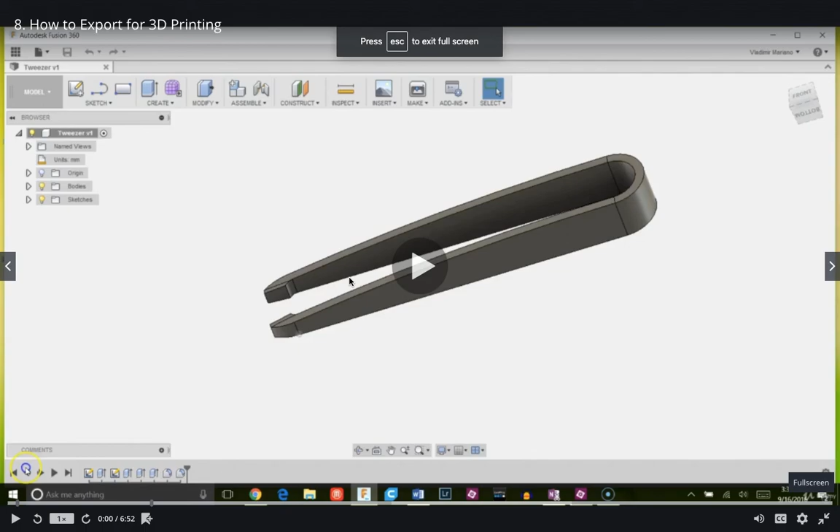Now that we've finished making our first 3D printable design, let's look at how we would send this to the 3D printer. With Fusion 360, this is very simple. Long gone are the days where you have to install a separate plugin to export this as an STL and then open up your printing utility to bring it in.

All you have to do is look at this icon where it says 3D print, or make. Click on it and you get this 3D print dialog box. The first thing it's going to do is have us make a selection. So what is it we want to print? I can just go ahead and choose my model.

As far as refinement, I tend to leave mine at medium and it does fine. Make sure under your output that Send to 3D Print Utility is selected. Here's the beautiful part: if you have any of these 3D printing software installed, it will actually go ahead and list them right out of the dialog box here.

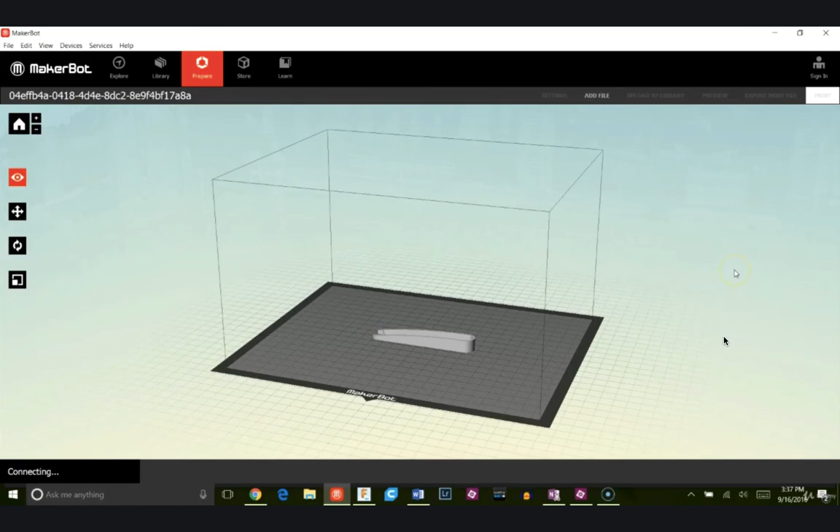So I can go ahead and, let's say I want to send it to my MakerBot. I'm just going to click OK, and it basically takes care of the rest. It'll open up MakerBot and actually place my model right on the build plate.

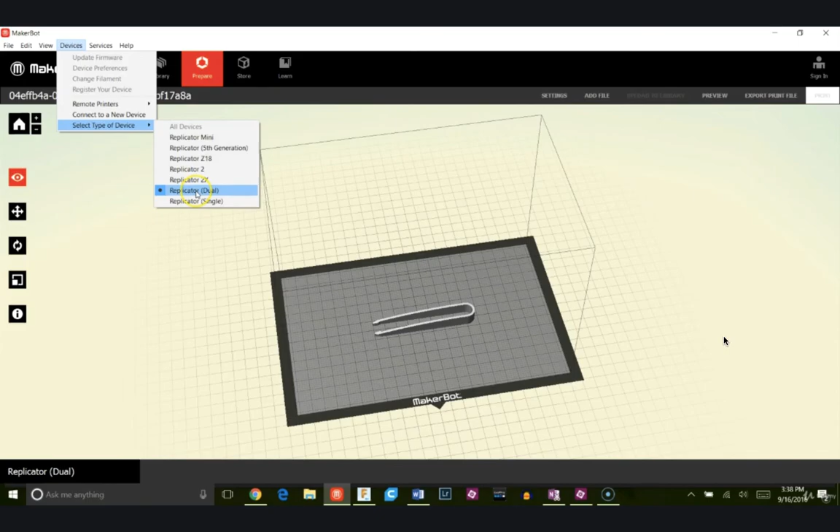Now let's walk through how I'd approach this as I'm printing. You may have experience with this software or you may not, but basically the first thing I would do is choose my device. I'm going to go to device, select type of device. I have a few printers, but let's say I want to send it to Replicator 2. I'll make sure that's the one selected.

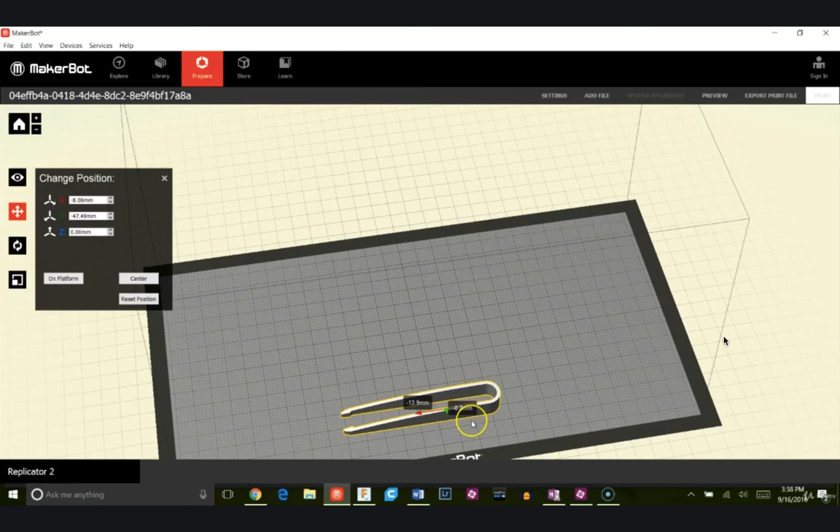Next I can position this simply by using these manipulators on the left side. If I want to place this more to the front, I can do that, or move it to the sides. Every 3D printing utility will have these sort of options to allow you to position and rotate your objects. In this case, it positioned it perfectly - that's exactly how I want to print it.

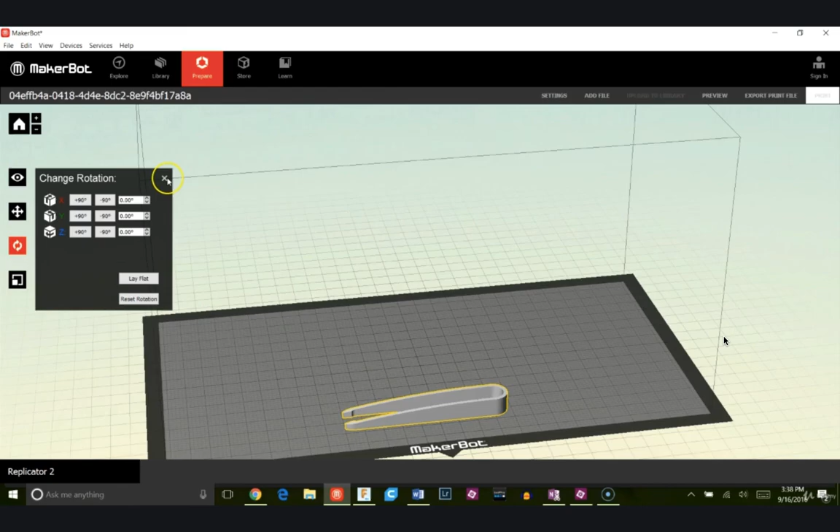But let's say, for example, that it was positioned like this. Well, you obviously are not going to print it in that orientation, so you would want to go ahead and position it the way that it's actually going to be able to print correctly. So you can play around with those. What I like to do, especially with the MakerBot software, is go to Edit and choose Auto Layout All, and that will end up usually doing a good job selecting the best orientation to 3D print the specific item.

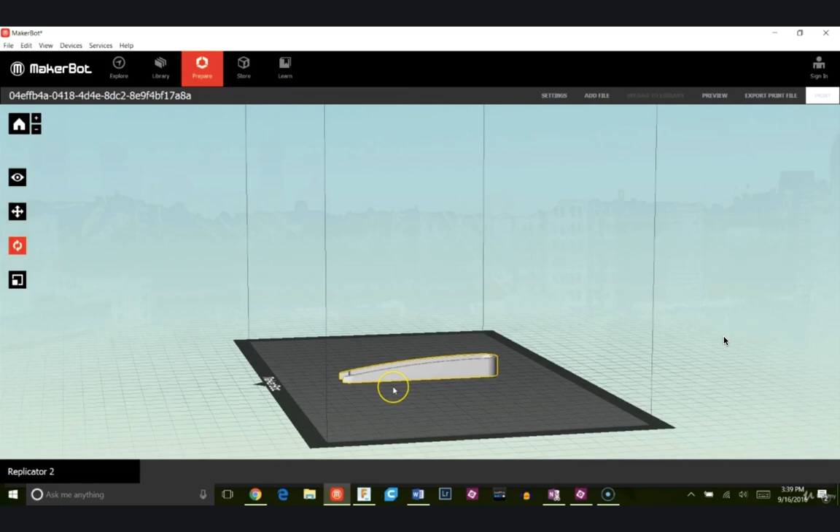Just remember how a 3D printer works - it relies on the bottom layers to support the top, when we're talking about this type of technology, fused filament fabrication. So just make sure it's positioned in a way that it's going to be able to print.

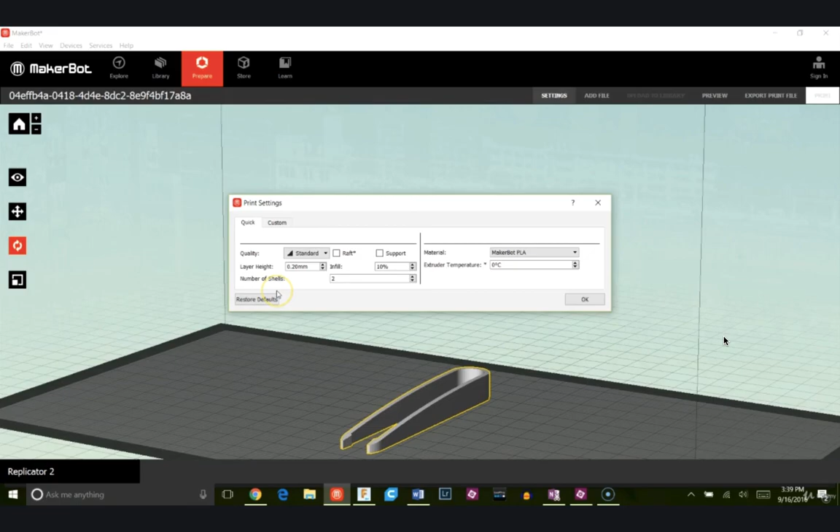Next, I'll briefly talk about my settings. I usually stick with 0.2 millimeters. You can go down to 0.1, or maybe 0.25 or 0.3. I usually try to print without a raft, with infill. I'm usually about 20%, and in this case I'm using PLA, and my extruder temperature with MakerBot I usually do 230.

Sometimes it's just a good idea to start with your defaults and then work your way from that. Honestly, I tend to use most of the defaults. The only thing I usually change is I don't print with a raft unless I need to, and maybe I'll play around with either 10 to 20%, or if I'm printing something hollow, I'll leave the infill at 0.

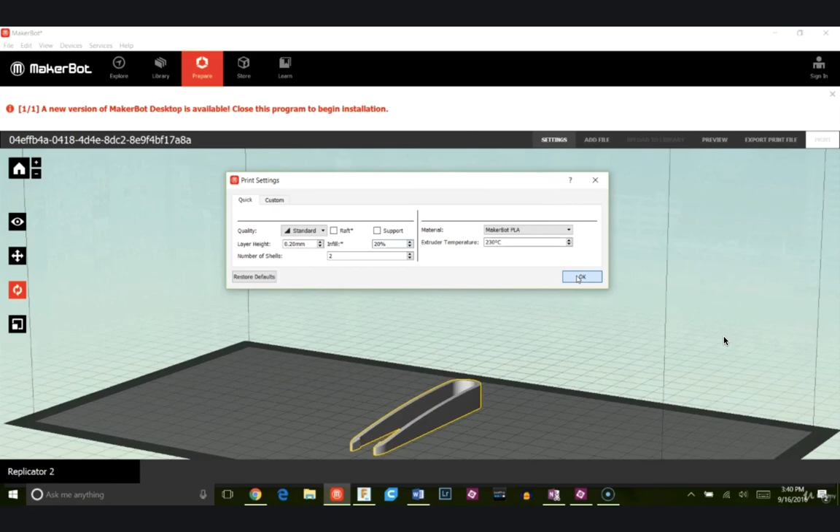As far as a guide to using the 3D printing utility, I just wanted to do a brief overview. I could go into a whole lesson on how to use these, but you can find good material either on that specific printing software's YouTube page or their website on exactly how to use all the different features. So next I would just click OK, export this to my printer, and usually save it to an SD card - select your SD card, give it a title, and then click Save.

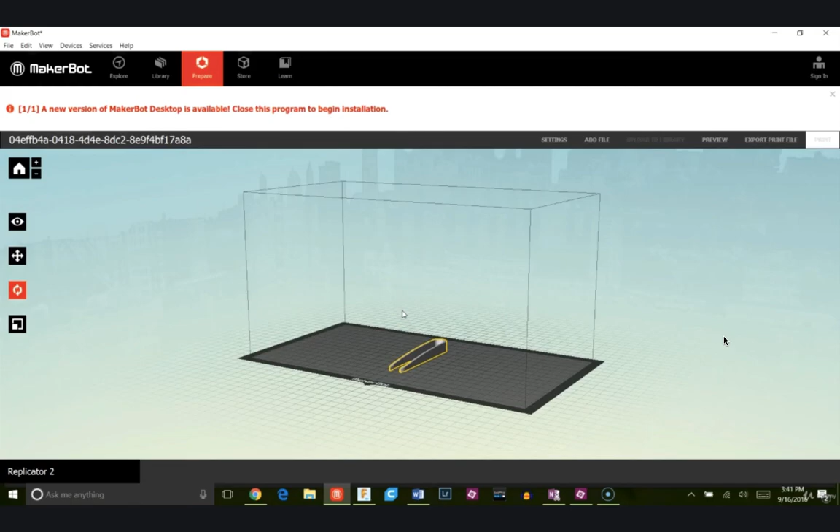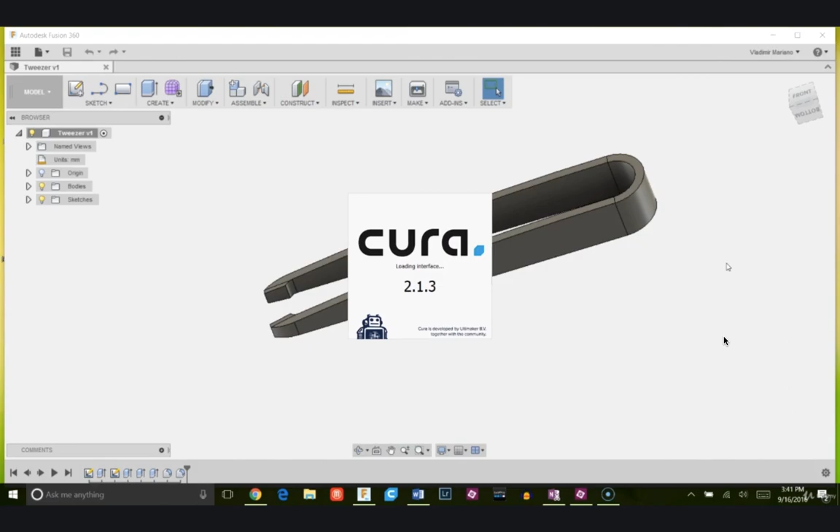So that's basically it. Let's try this again, but we'll use a different software. Let's say I want to use Cura instead of my MakerBot software. I'll go ahead and choose Cura, click OK, and it does the same thing - it'll open up Cura for me and lay this right into the bed of the printer. In this case, I have an Ultimaker 2 Plus.

And the same thing - we see similar settings here where we can choose our nozzle diameter, our density, our infill, all our settings are here. So similar situation. The main point I want to show is how easy it is to go from Fusion 360 to your printing software to organize your model and send it right to the printer.

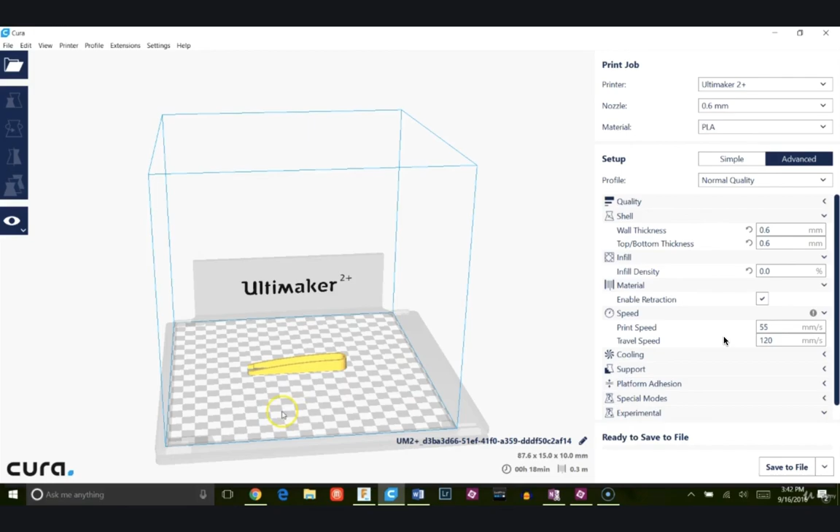Again, if you want to use the Ultimaker software, which is Cura, if you go on the Ultimaker website, they have some good videos showing you how to use their specific software.

I'm going to go through one more option - let's say you just want to save this as an STL. Maybe your printer doesn't show on this list, or you just want to save the model as an STL to upload it to a website or send it to a friend to 3D print for you. In that case, all you do is uncheck Send to 3D Print Utility, choose your model, and click OK.

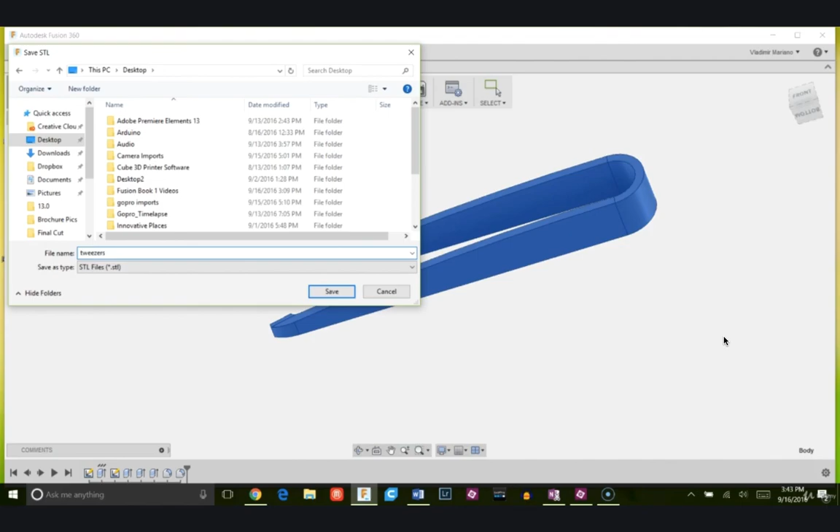What that'll do is open up this dialog box, and you choose wherever you want to save it. I'm just going to throw it on my desktop, give it a name, and notice that the file type is STL, so I can just click Save. Now I have an STL file, so I can open up the printing utility separately and import it there, or upload this to a website or do whatever I want with it.

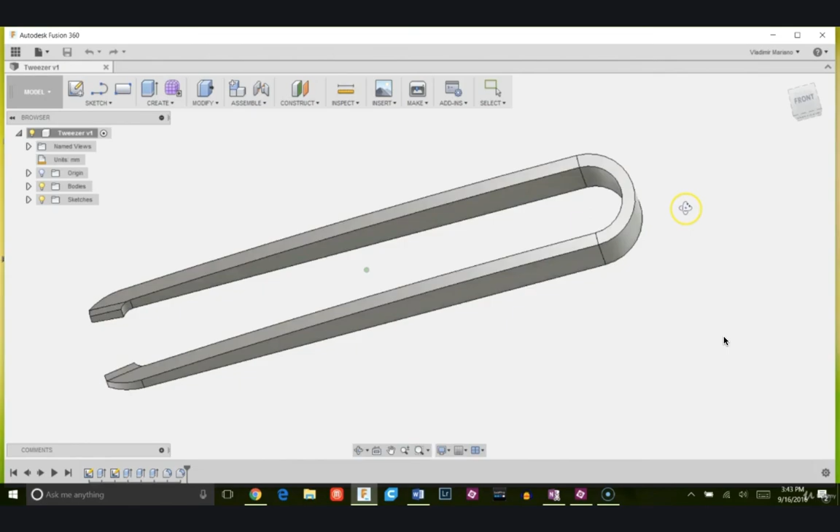So that's basically it, and that's how you get your model ready for 3D printing. As you can see, very straightforward process with Fusion 360 - they built it right into the software.